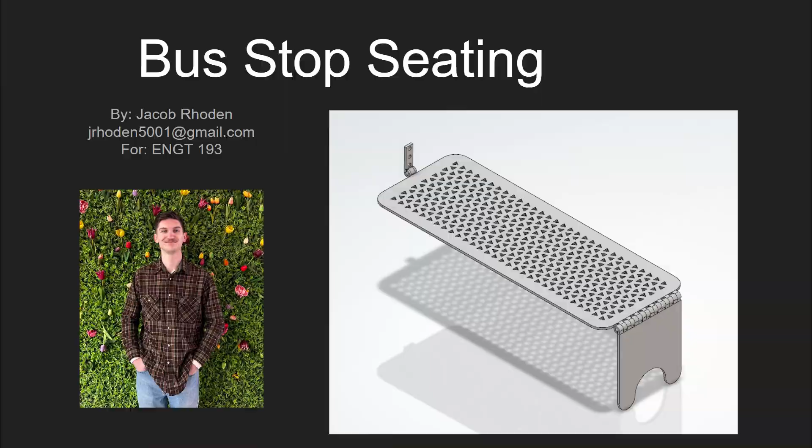So I was thinking it'd be smart if we had something we could just attach to these that would be cheap, that could add some extra seating. Since we have this pole that has all these holes here, you can make this and then put the two little bolts through this attachment point, and then instead of 2 seats, you'd have 4, maybe even 5 seats, depending on how big or small you wanted to make this.

And obviously I tried to mirror some of the aspects of this with the rounded corners, and you can see here they have the cutouts on them to make sure that water doesn't pool, just because at least here it's very, very rainy.

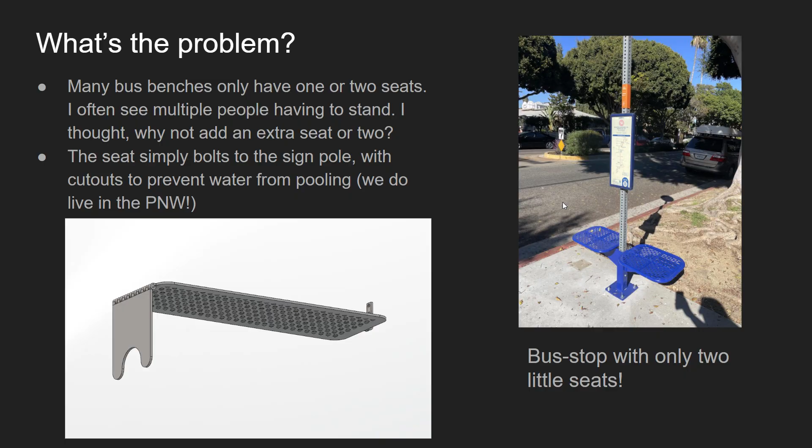So I realized that having it be stationary would be better than having it be movable with a handle or anything. I removed the center support leg because I didn't think it would be necessary, and working with the sheet metal to create that hinge would have been really difficult. So at least for this iteration, unless it was deemed necessary, I just removed that.

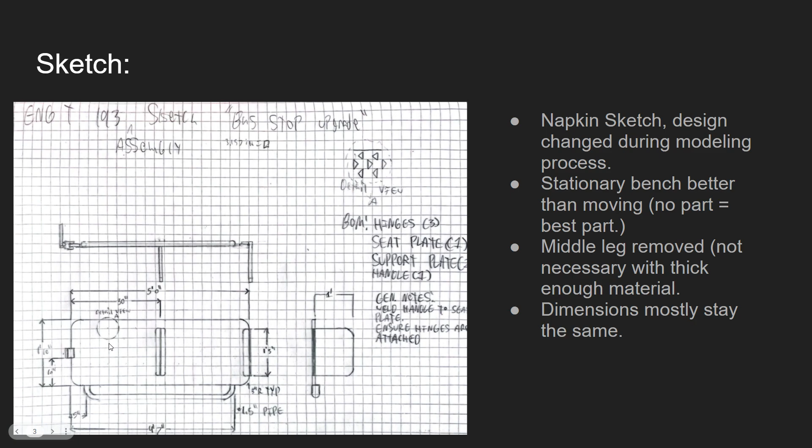Otherwise, most of the dimensions stayed the same, so the overall sizes and lengths and thicknesses all pretty much stayed the same. You can also see here my first detail view of the pattern throughout. So here we have our initial wall sketch with our datums and our profiles. This is just the overall seat length and width, and then we have the radius corners, and on the left you can see some of our specifications.

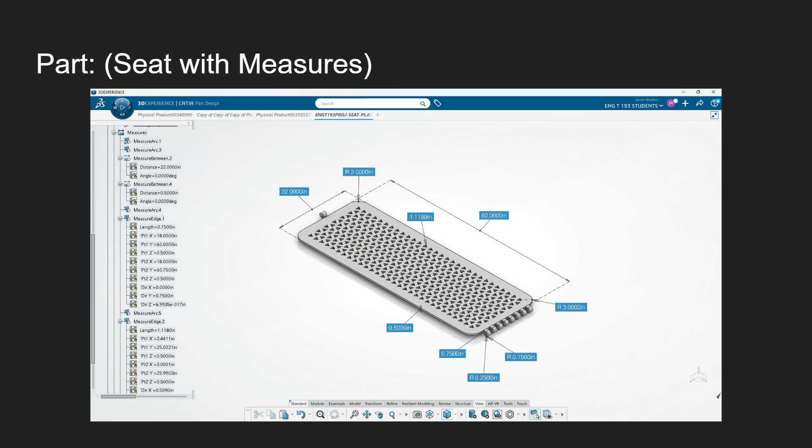Here's the finished seat plate with the measures. You can see those hinges on the sides. Then we have all of our overall sizes, our radiuses, our thicknesses, and the size of the triangle sides, which is the same for every triangle. Here we have the inertia for the seat, and it's also on the left side there.

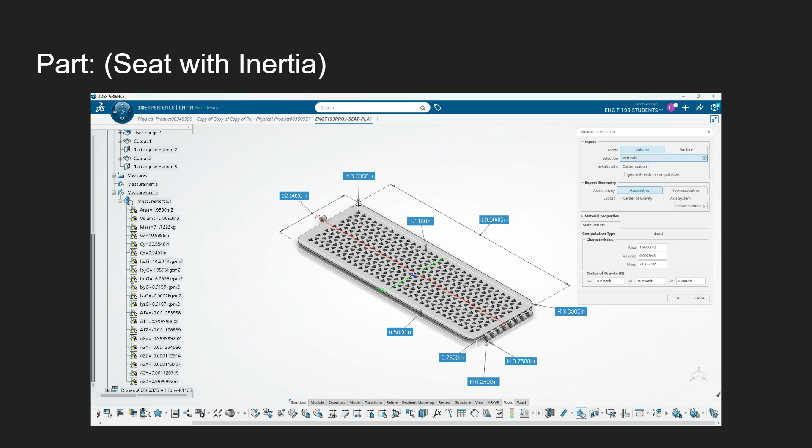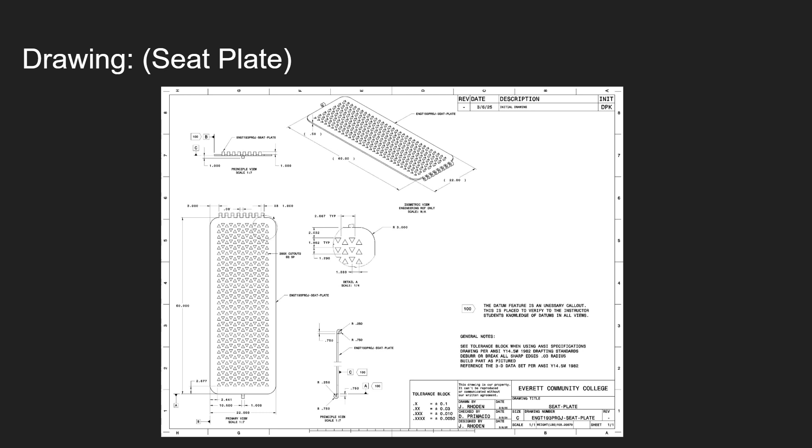And then I was also able, on the right side view down here at the bottom, to actually break that view up to make more room for the detail view, and I think that came out very well. Next, here's our final assembly, just labeled.

So we have our connector up there with the holes you would bolt to the post. We have the hinge. I just made a little bolt for the hinge and everything so that they wouldn't be able to come apart. We have the seat plate, we have the second hinge, which is a little bit longer, and the leg plate.

So in conclusion, I learned how to utilize the sheet metal a lot better, especially making those hinges. That was the main experience I wanted to get out of this, was learning how to make those. You can see these hinges right here, where you can have two pieces of sheet metal and bend them and then put a rod through and be able to bend them and act as a hinge.

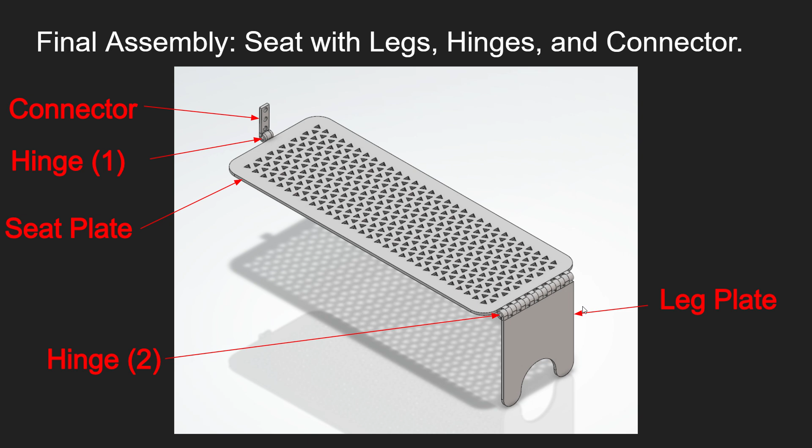And then overall, I also really enjoyed learning how to do these perforations and making sure that they looked good, because I ended up spending a while just trying to find a size for the triangles and a way to offset them and everything that I thought would look visually appealing but would still be serviceable, so thick enough that there would actually still be a lack of stress being accentuated but still be usable.

For future work, I would hopefully learn how to actually manufacture this, so being able to actually find out how to make the tooling that you would need to stamp all those out and to actually put those bends in and everything. But this was a really great experience for learning sheet metal, because all three of the major parts, the connector, seat plate, and leg plate, are all just pieces of sheet metal that would be cut out and bent and formed as needed.

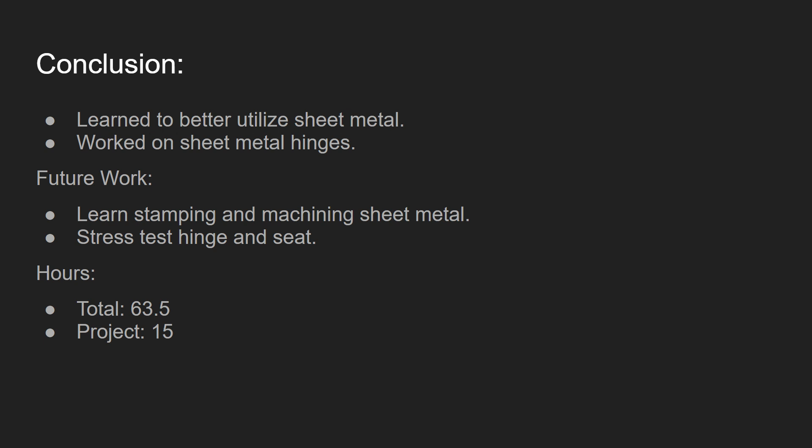I spent around 63, I think it's a little more now, hours for the class overall, and then I spent about 15 of those hours working on the project, brainstorming, sketching, and modeling, because initially, like I said, I was trying to do some other things with doing another leg in the middle and trying to figure out how I could make it so that it would be able to fold up and move.

But then throughout the modeling I had to lower my scale with that, just because I realized that it would be a better idea to have something like this that does not move as much, which is definitely something good to know with working on something that would be used a lot and would have a lot of stress on it. I think the engineering phrase is "the best part is no part" for designing. But yeah, so that's my conclusion.